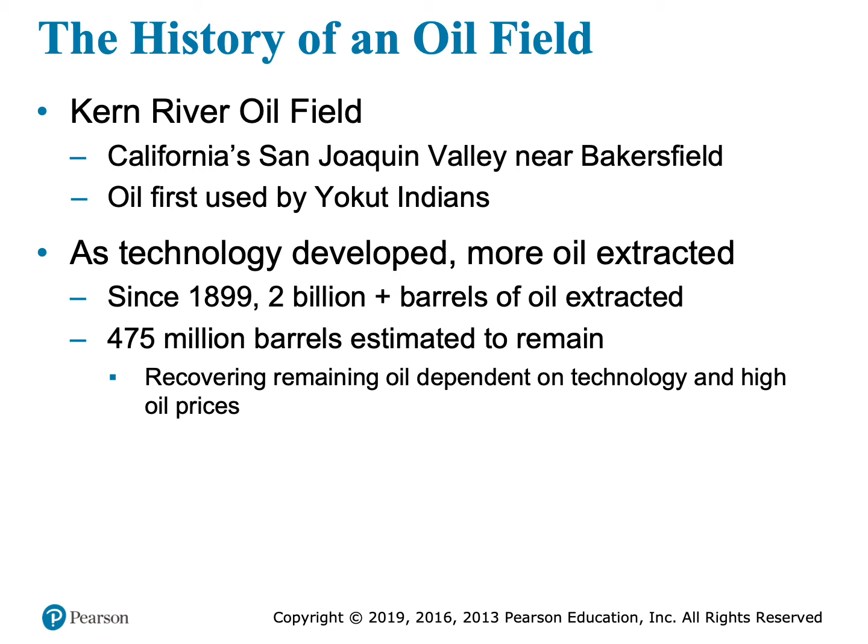There's the Kern River oil field in California's San Joaquin Valley near Bakersfield, where oil was first used by the Yokut Indians. As technology developed, more oil became extracted from this field. Since 1899, over 2 billion barrels of oil have been extracted from this field, with only about 475 million barrels remaining. Recovering the remaining oil depends on how good our technology is at getting it out, and how high oil prices are.

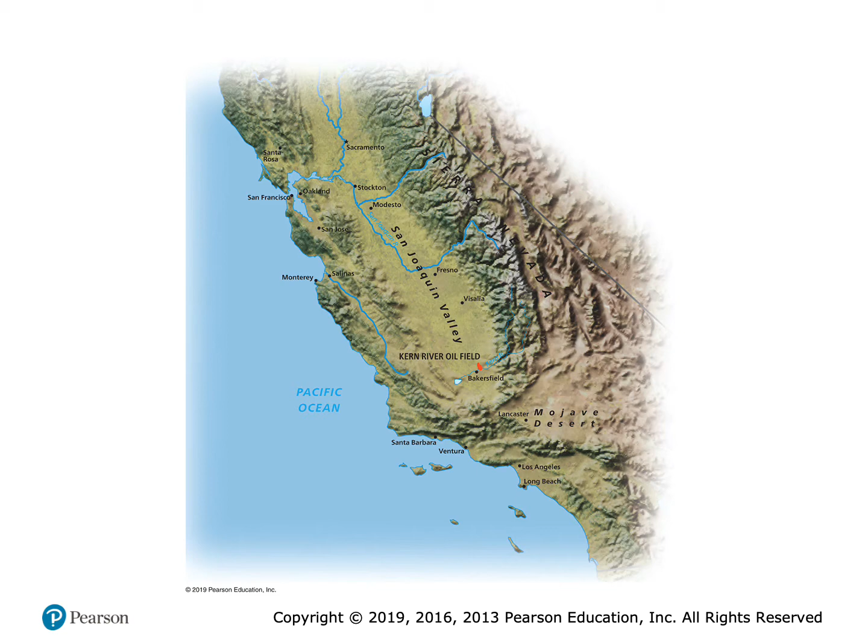Energy sources can be primary or secondary energy. Primary energy is energy contained in natural sources such as coal, oil, wind, and sunlight. It can be changed into other forms through a process called energy conversion. These other forms are classified as secondary energy, such as electricity or the kinetic energy of an automobile. So electricity is when primary energy is converted into another form.

Usually that's by using sunlight, wind, coal, or oil to move a turbine or a big blade, and moving that turbine generates electricity. End use refers to the final application of energy, such as running an appliance or driving a car. The energy conversion efficiency is the percentage of primary source energy that is captured in a secondary form of energy.

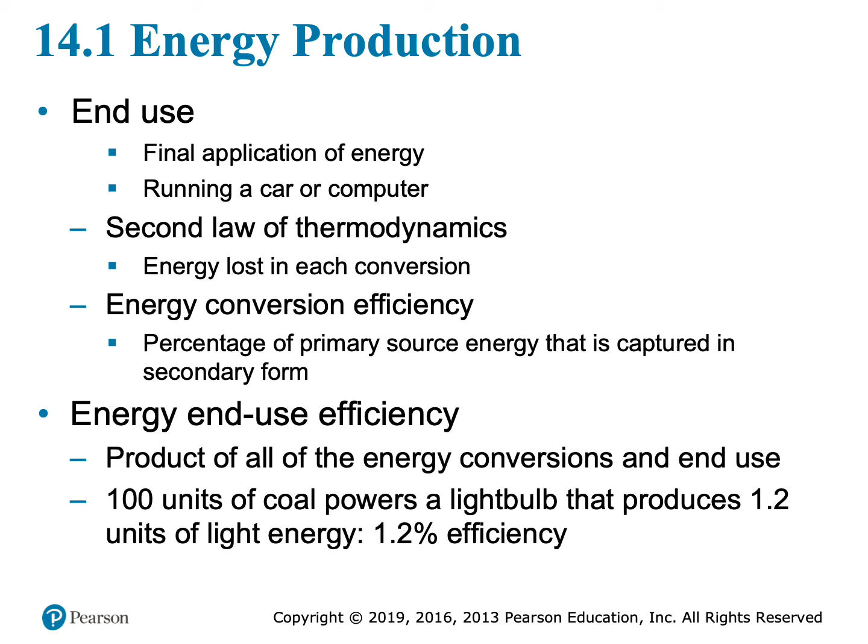The big forms of energy are either non-renewable or renewable. Non-renewable energy is derived from sources that exist in limited quantities - kind of like when you use them, you lose them, there aren't any extra left over. These include fossil fuels such as oil, coal, and natural gas, and nuclear, which relies on the element uranium.

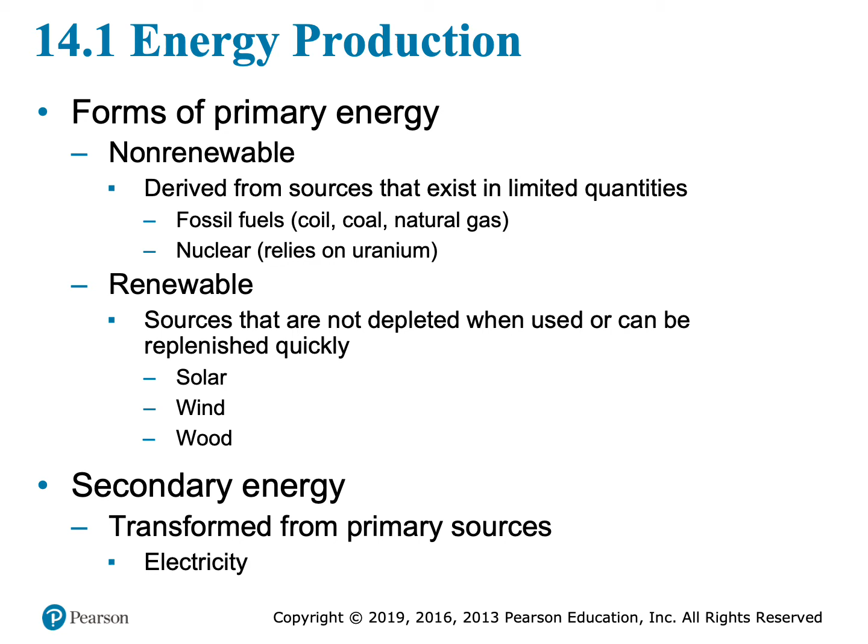Renewable sources are a little more popular nowadays. These are energy sources that are not depleted when used, or that can be replenished quickly. So solar is a renewable form of energy - we'll always have sunlight, we'll always have wind, and we'll always have wood from timber and trees. Then secondary energy refers to energy transformed from primary energy sources, such as electricity.

The end use efficiency - this shows the electricity to power a light bulb comes from the potential chemical energy of coal burned in a coal-fired power plant. In these energy transformations, 100 units of chemical energy is required to produce 1.2 units of visible light energy. Again, this is what we call end use efficiency for this process, and it's 1.2%.

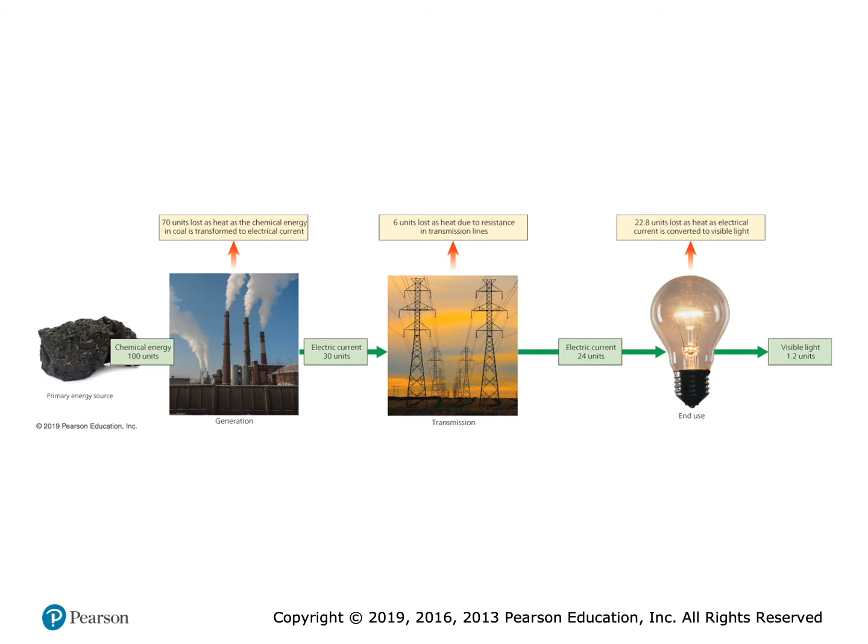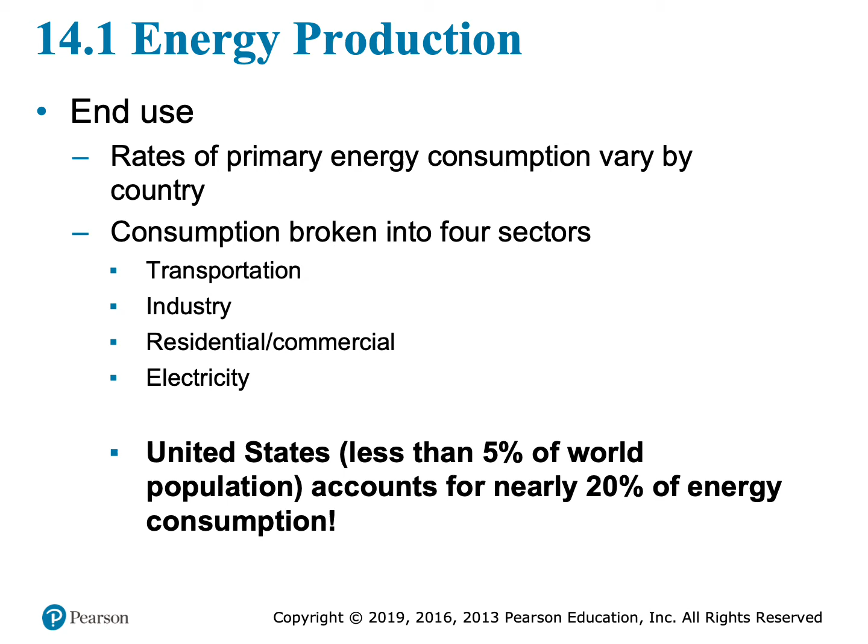For end use of an appliance or a car, the rates of primary energy consumption vary by country, and consumption of energy is usually broken into 4 sectors: transportation, industry, residential and commercial, and electricity. The United States, which is less than 5% of world population, accounts for nearly 20% of global energy consumption, which is kind of a crazy statistic.

Here's a look at the United States oil consumption gap. Oil consumption in the US has increased by over 3-fold since 1950 - again, think of powering your cars when thinking of oil production. US oil production peaked in 1970 and has started to decline, and it has increased since 2009 for reasons we'll discuss a little later.

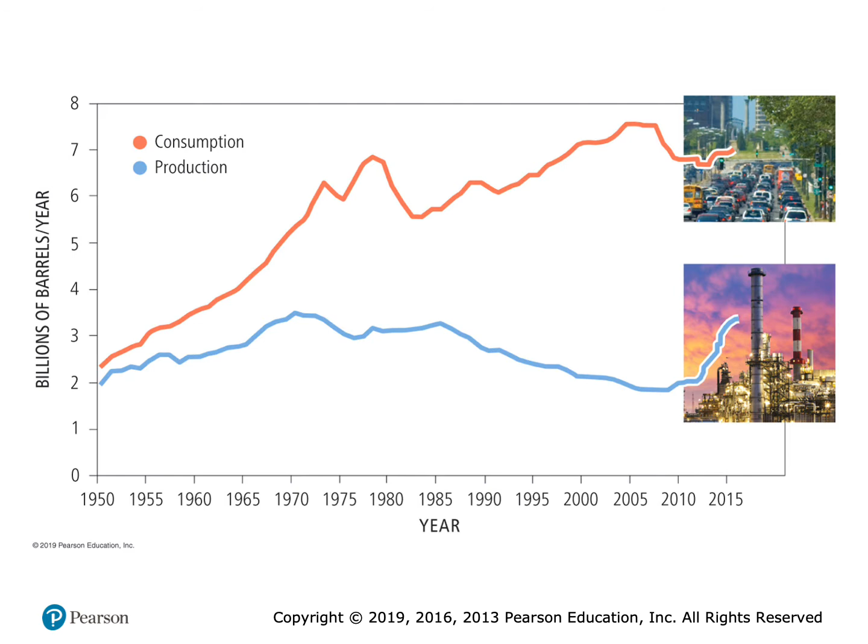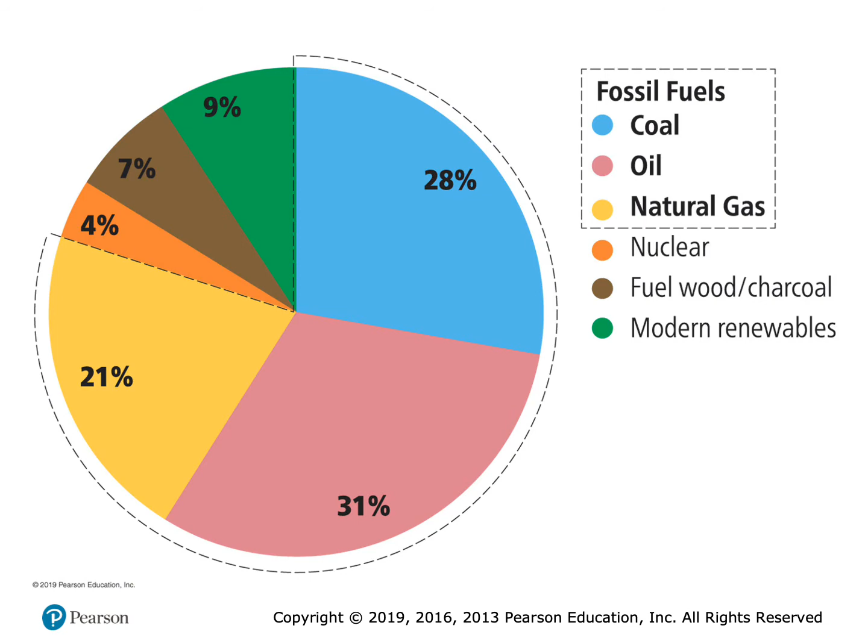Then we get to the economics of energy resources, and this brings us to the next part of our notes. The proved reserves of non-renewable energy sources are the quantities of an energy source that could be recovered from known deposits using current technology at current prices. And the reserves to production ratio, we put it as a fraction R over P, is the proved reserves figure for a given fuel divided by a particular year's level of production.

And we'll get to energy return on investment in the next slide. So this reserves to production ratio just estimates how long a fuel source will last at a current consumption rate. So again, a really popular ratio that many are wondering about with different energy sources right now.

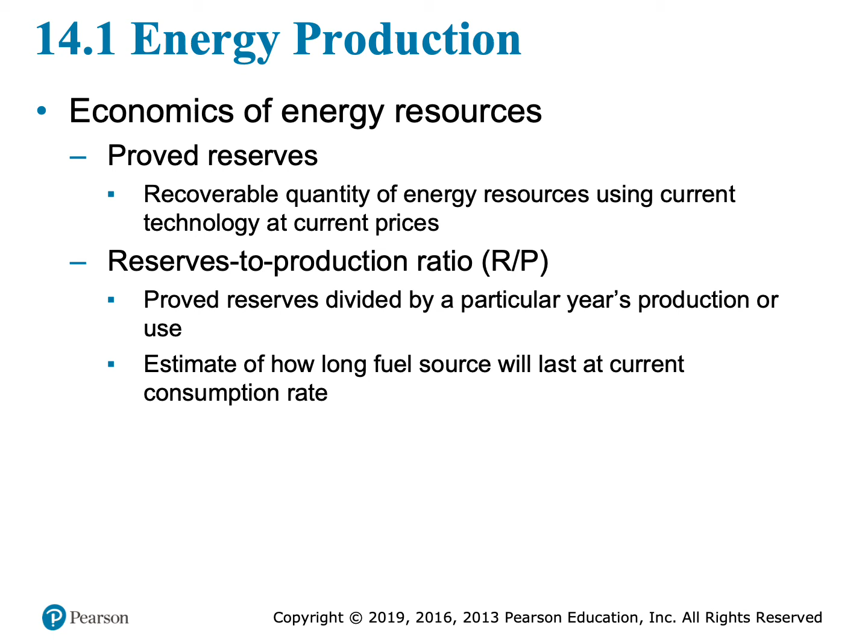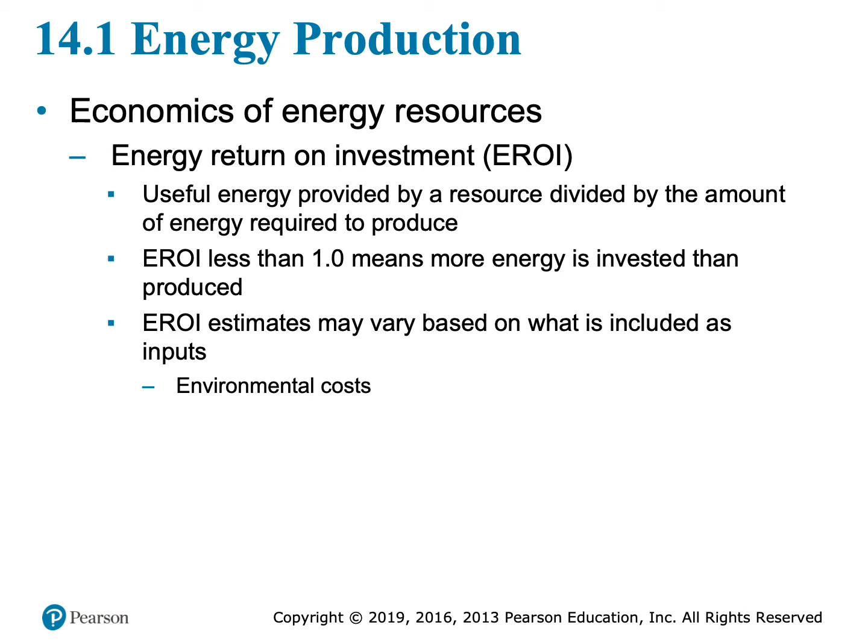The energy return on investment, abbreviated EROI, is useful energy provided from an energy resource divided by the amount of energy it took to produce it. If it's less than 1, it means more energy is invested than actually produced. And these estimates might vary based on what is included as inputs, such as environmental costs.

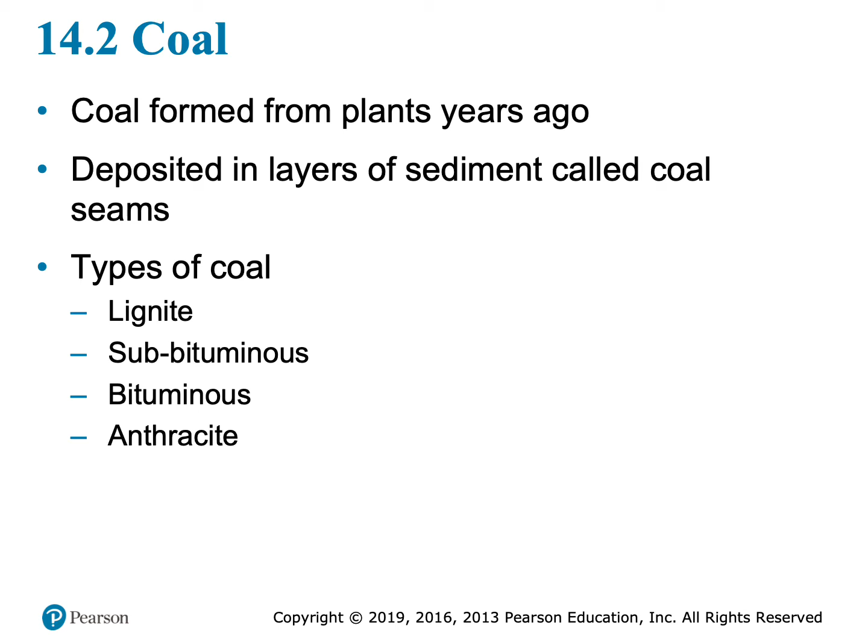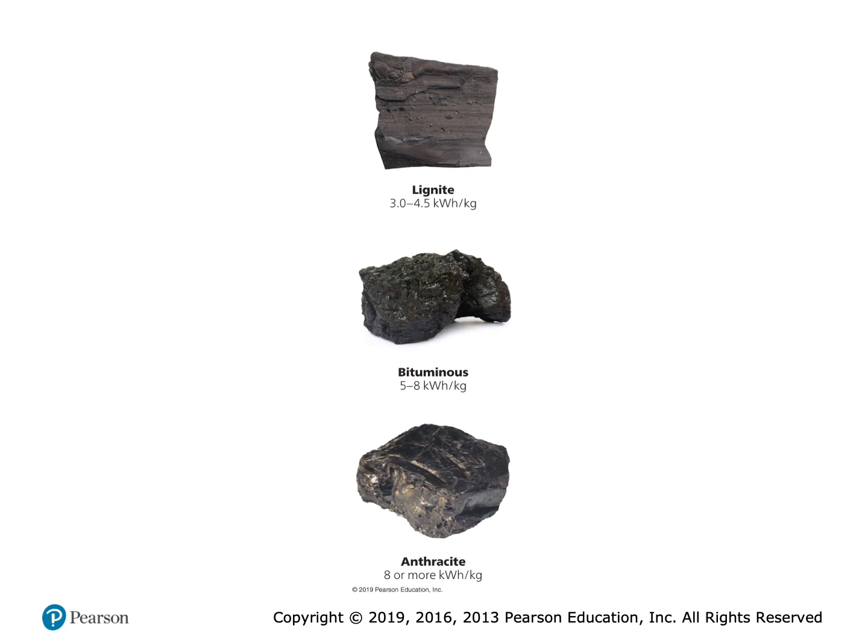So let's talk about coal and what it is. It was formed from plants many years ago. It's deposited in layers of sediment called coal seams, and there's different types of coal: lignite, bituminous, and anthracite. Here's a look at the different types of coal and the energy content per unit weight. It's highest in the coal type anthracite, which is the one at the bottom, and less in the ones at the top.

Extraction and processing of coal: it's removed from sediments by underground and surface mining, and then it's cleaned to remove dirt and other impurities. Globally, 67% is used for electricity generation, and 90% of that is in the United States. It's transformed into electricity at a coal-fired power plant.

So again, how does coal create electricity? We burn coal in a power plant, and that steam moves a steam turbine. So the steam from the burning of the coal will move this turbine, or a big kind of windmill-like structure, and that turbine then is hooked up to a generator, which creates electricity.

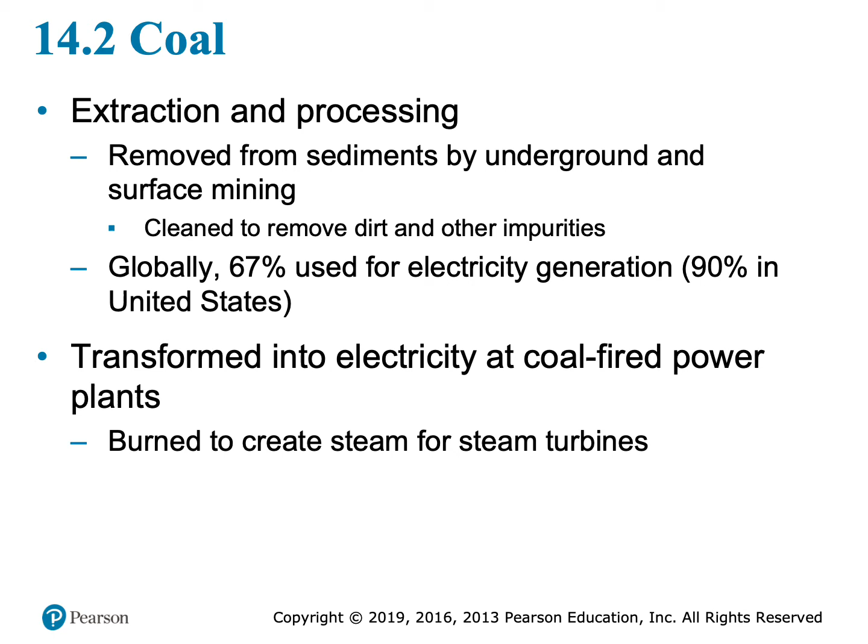World coal reserves are shown for selected regions and countries. Coal is very abundant in North America, Europe, and Asia. Among countries, the US ranks number 1 in coal reserves, as you can see from this picture.

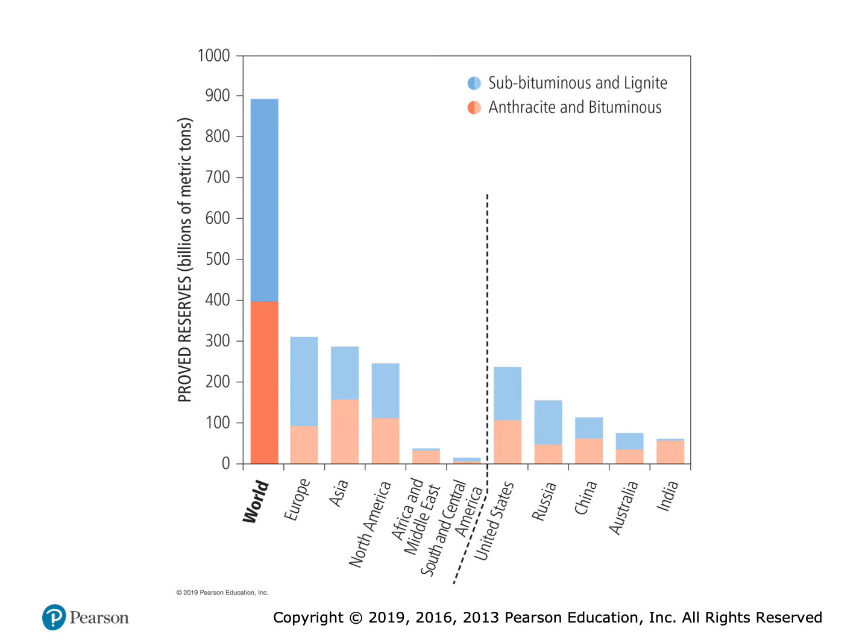Underground coal mines employ an array of shafts and tunnels. Some of these are used to transport miners and equipment into and out of the mine, and others are used to ventilate the mine and haul the coal out. And you might remember instances in history where people have been trapped in mines if a part of it falls down. So coal mining is very much active today still for electricity purposes.

In mountaintop removal coal mining, the upper portion of a mountain is actually removed to expose the coal seam, and the overburden is then deposited in surrounding stream valleys. And again, the coal seam is where the coal is deposited or found.

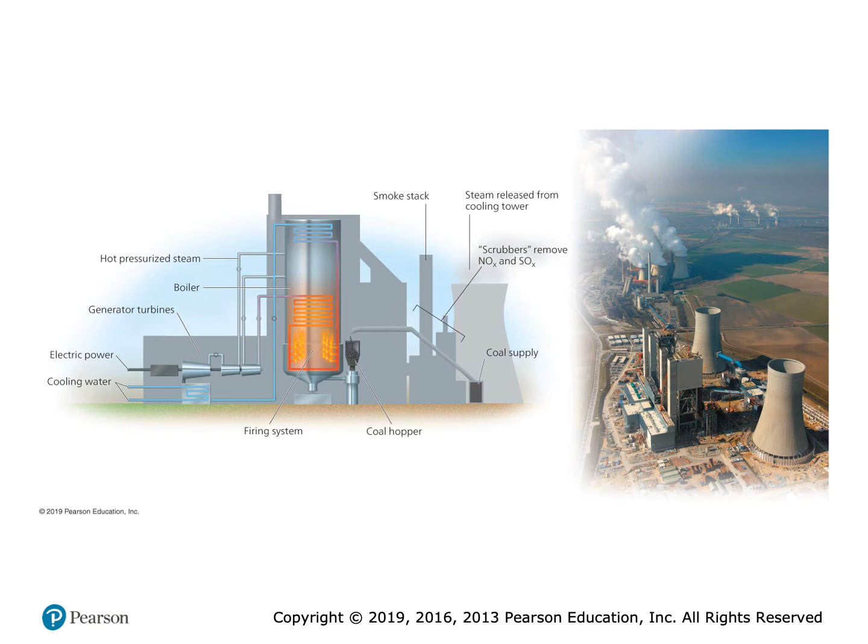A little more about coal, some of the environmental impacts of coal. Mining destroys habitats in mountaintop coal removal. Mine tailings, which are rock and debris from mining operations, can be acidic. There's usually a lot of exhaust from coal fires, which are releasing numerous toxins, mercury and carbon dioxide into the atmosphere. And fly ash is actually solid material waste that can be produced from these power plants as well.

So this is showing oil and gas reserves formed in porous rocks where there was enough organic matter to produce oil, and then an impermeable rock cap prevented its upward movement. So the natural gas, which is lighter than oil, gets trapped above the oil.

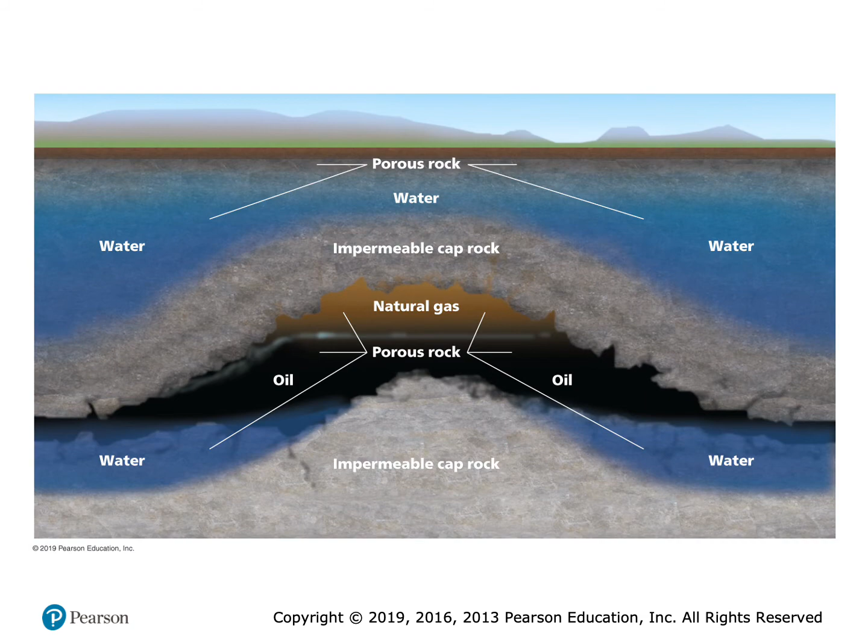These oil reserves can be conventional or unconventional. And if you're on the second page of your notes at the top, we'll answer your blank in number 3. Reservoirs composed of permeable rocks with numerous pores and fractures that hold small drops of oil are conventional. And crude oil and natural gas are found in other unconventional geological settings. Some other types of geological settings where we can find oil reserves are in shale and in tar sands.

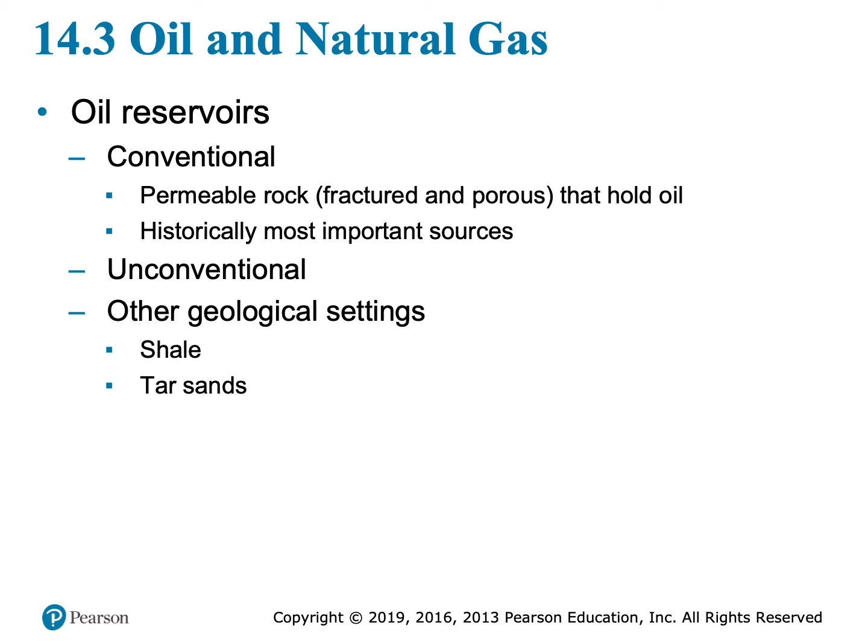Nearly half of the known oil reserves exist in the Middle East. About 18% is in Venezuela—that's how Venezuela got into a lot of their financial problems, because their government was actually borrowing money against oil that they were planning to export. 10% is found in Canadian tar sands, and only about 2% is found in the US.

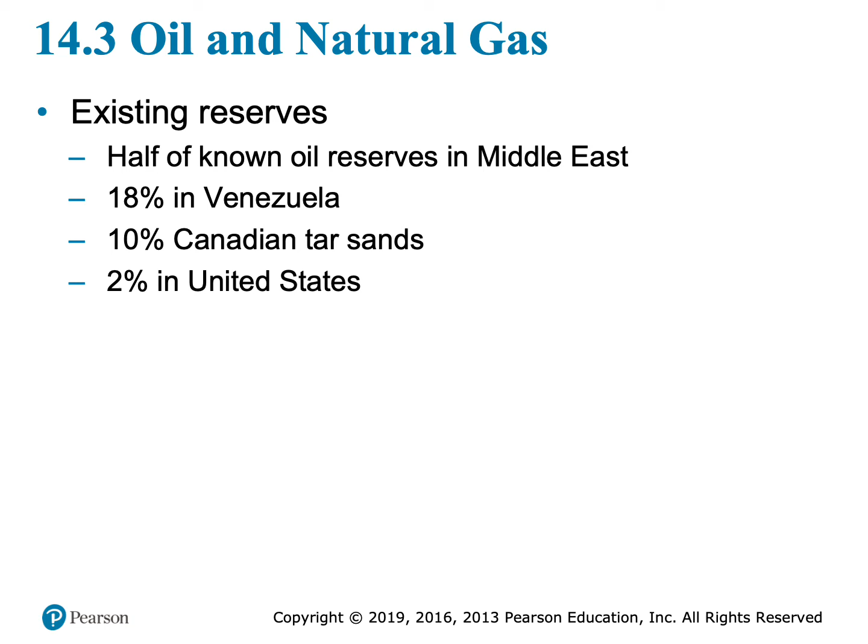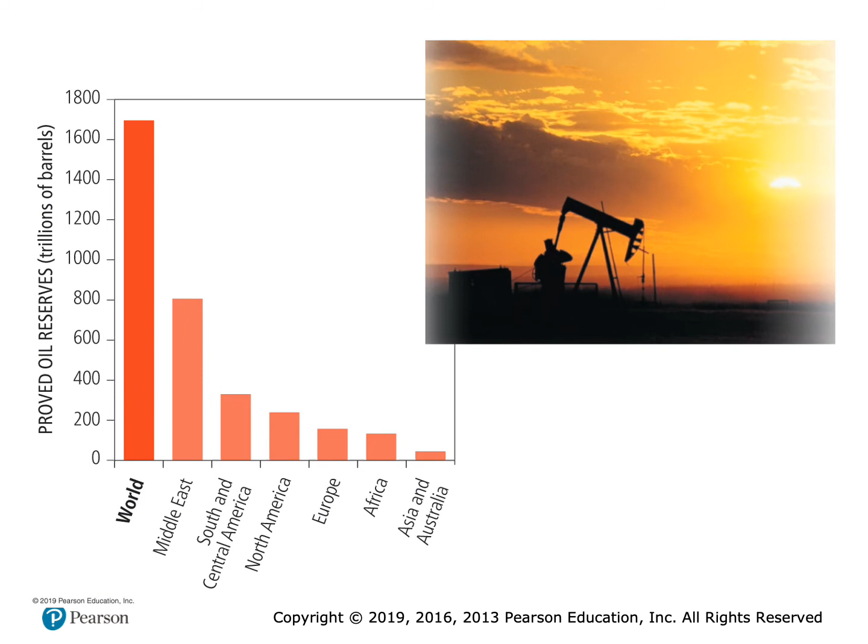Nearly half of global proved reserves of oil are found in the Middle East, as you see there, with many in South and Central America, and you can see where the other countries fall for proved oil reserves.

Oil extraction and processing. We're going to fill in some blanks here under oil production. Crude oil is pumped from reservoirs and sent to refineries. If there's enough built-up pressure to push crude oil to the surface, this is called primary oil recovery, and that usually extracts about 20% of the oil in the reserve.

After that, secondary oil recovery methods inject water into the reservoir to increase pressure and extract another 10 to 20%. Then oil companies use tertiary oil recovery methods that stimulate the flow of oil by injecting carbon dioxide, steam, or hot water into the reservoirs. Some of the rocks are not porous enough to allow sufficient flow.

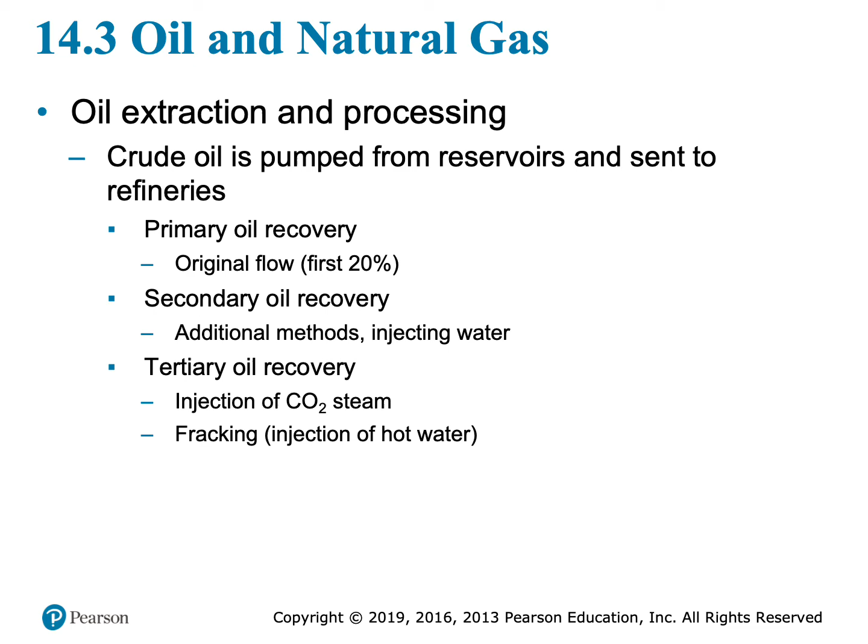Engineers have developed a technique called hydraulic fracturing, or fracking, that you'll hear a lot about. This involves injecting hot water to produce natural gas from deposits of shale, using high pressure liquid to actually fracture the rocks or break them apart. Sand mixed with these liquids then allows oil and gas to flow.

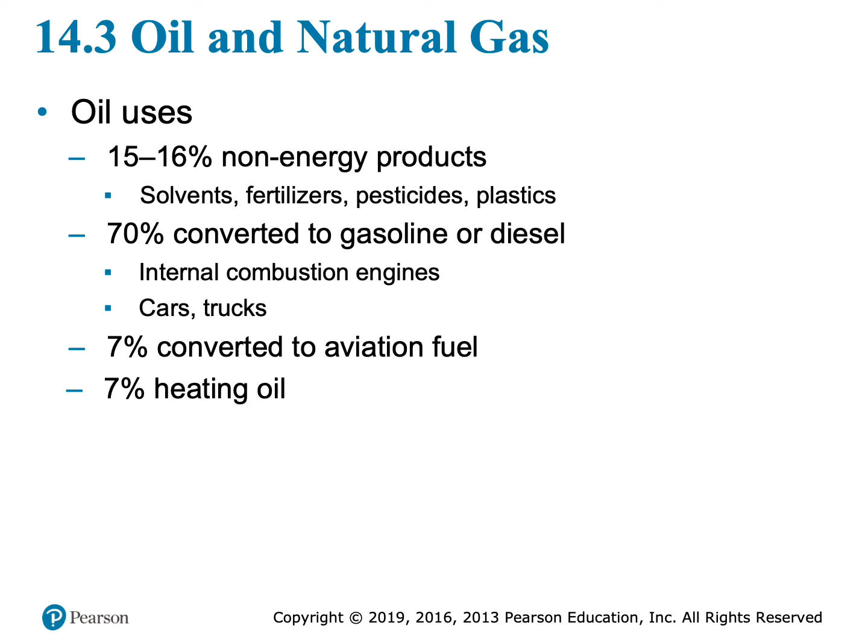Oil uses: 15 to 16% of oil is used for non-energy products like solvents, fertilizers, pesticides, and plastics. 70% of oil is converted to gasoline—I think we all know that, gasoline is the big sucker of oil. 7% is converted to aviation fuel, and about 7% is used for heating oil.

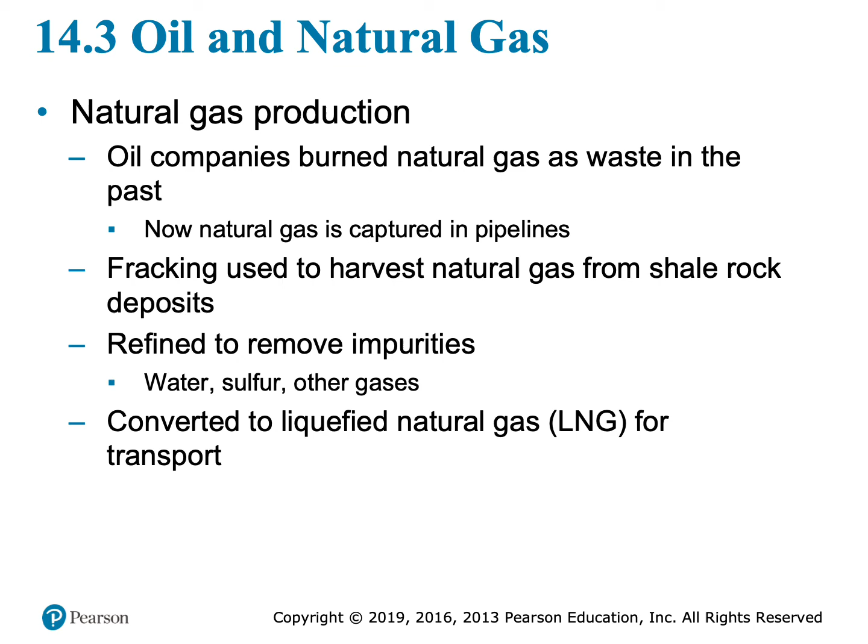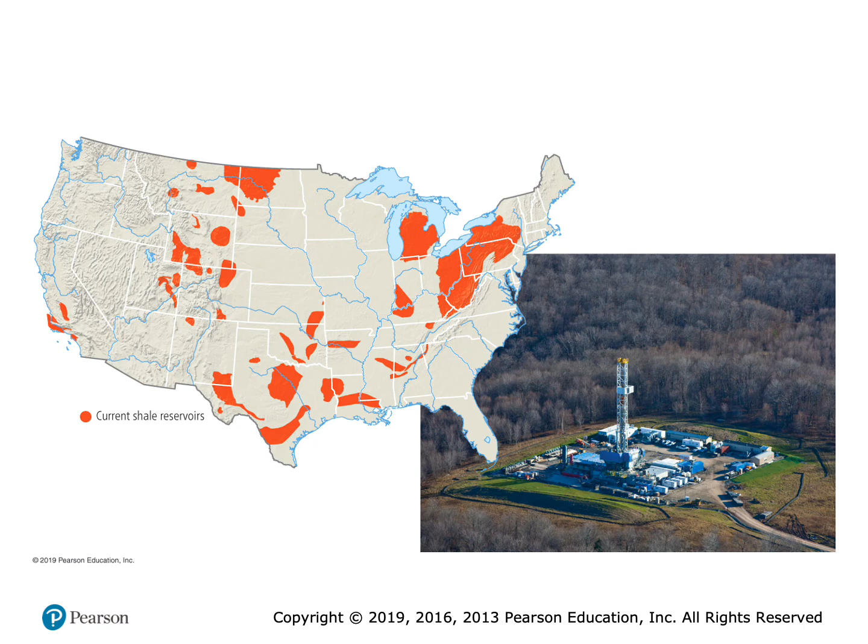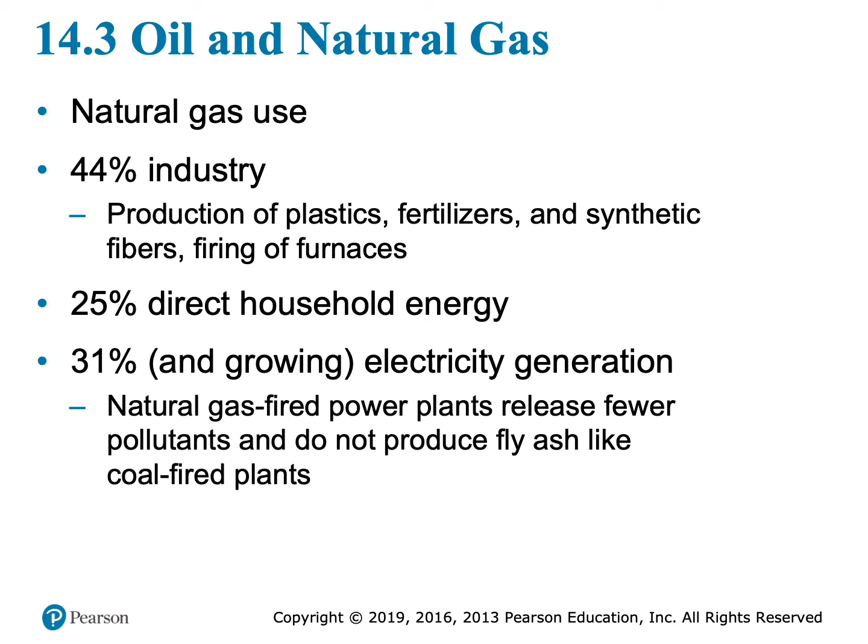Natural gas uses: 44% are used for industry, such as producing plastics, fertilizers, synthetic fibers, and firing of furnaces. 25% are direct household energy uses, and 31%, and growing, are for electricity generation. That's because these natural gas-fired power plants release fewer pollutants and do not produce fly ash like coal-fired plants.

Environmental impacts of natural gas—this is where we have some more blanks to fill out, about two-thirds of the way down on page 2 of your notes. Environmental degradation: locating and drilling for oil and natural gas presents risks to habitat and wildlife. Transport of oil and spills can cause major damage to wildlife. Emissions include carbon monoxide, carbon dioxide, hydrocarbons, and nitrogen oxides.

The combustion of oil-derived fuels accounts for 31% of all human-caused greenhouse gas emissions. Another impact, whether environmental or otherwise, is just the political turmoil—politicians argue either for or against certain aspects of these policies.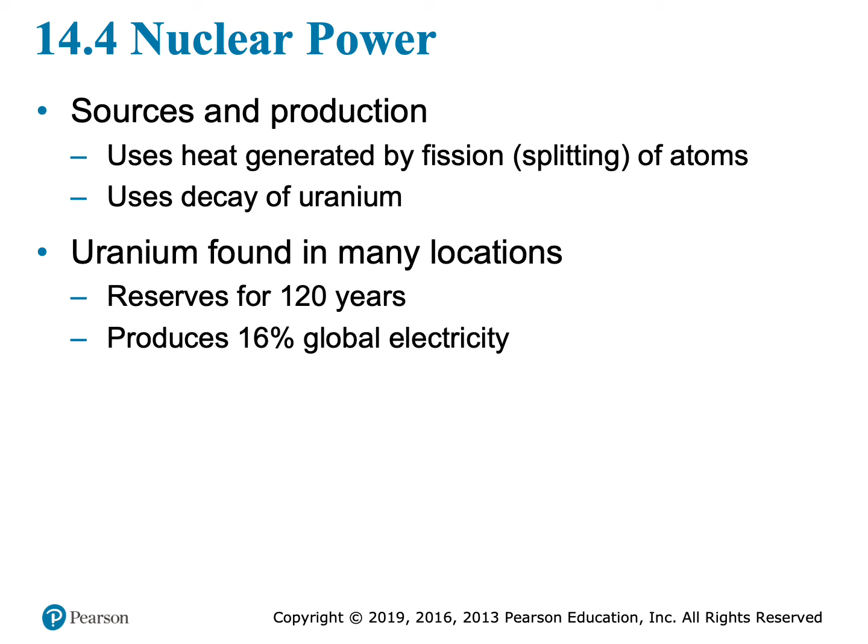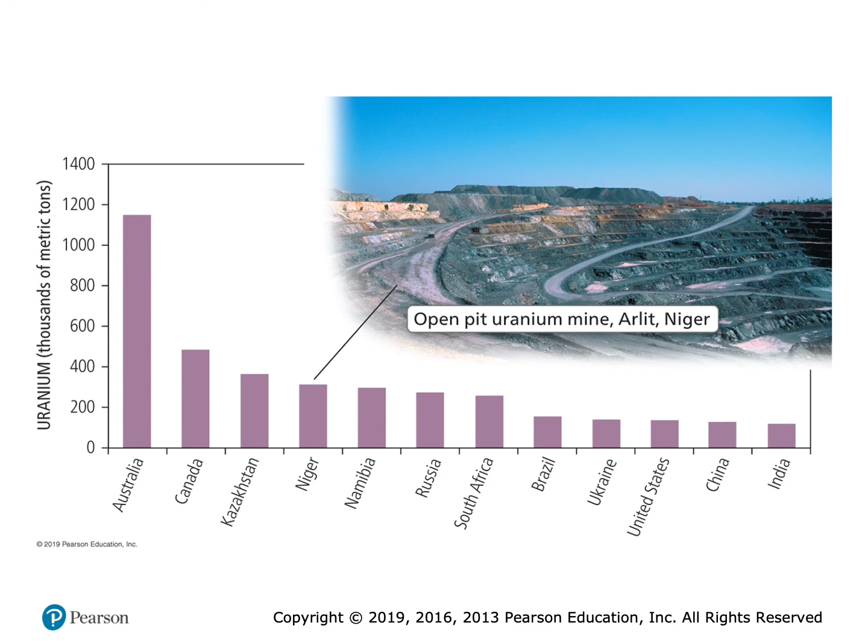But if it's controlled, there are reserves in many locations, and it can produce 16% of global electricity. Here is where the proved uranium reserves are located: Australia has a lot for some reason, Canada, Kazakhstan, Niger, Namibia, some Europe countries, some African countries, and South Africa and Brazil, some South America too.

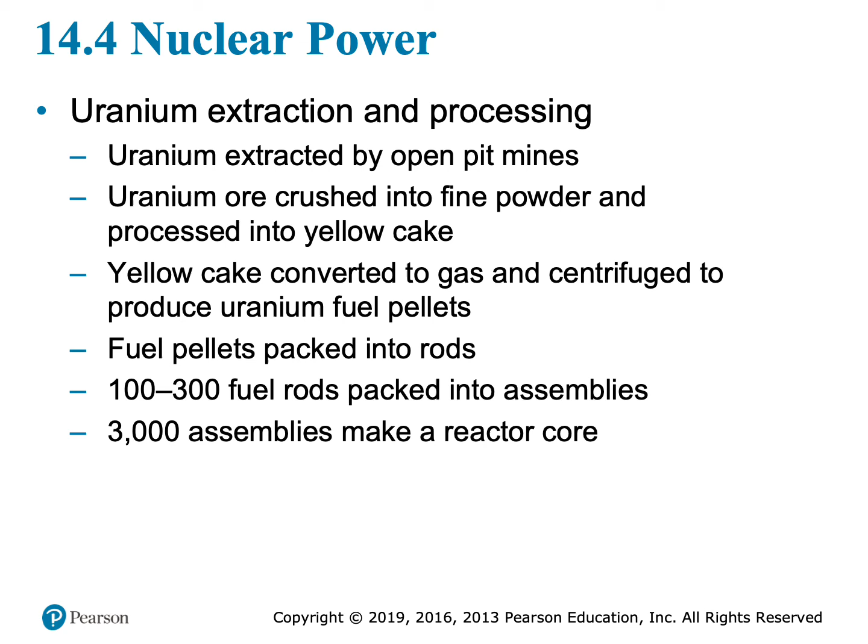Uranium extraction and processing: it's extracted by open pit mines. The ore that is extracted is crushed into a fine powder and processed into what they call yellow cake. The yellow cake is converted to gas and centrifuged, or spun down, to produce uranium fuel pellets, which are packed into rods. Then 100 to 300 fuel rods are packed into assemblies, and 3,000 assemblies make up a reactor core. So this is a look at how they get the yellow cake, put it into fuel pellets, into a fuel rod, and then take 100 to 300 to create a fuel assembly.

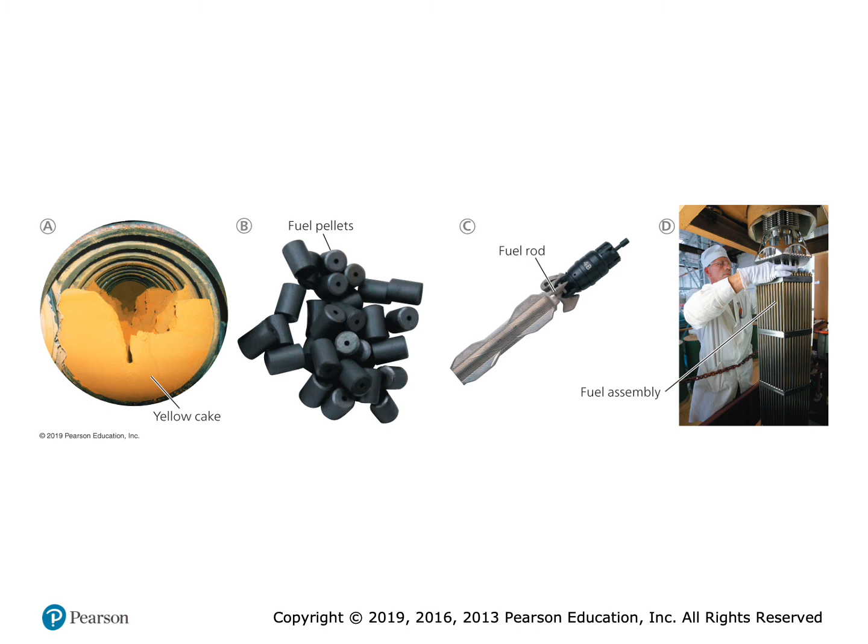The heat generated from the controlled fission of uranium is used to heat either water or sodium to extremely high temperatures and pressure. This superheated liquid is then used to generate steam. Again, the end goal is to produce steam that will power or turn turbines, which in turn drive electric generators and create electricity.

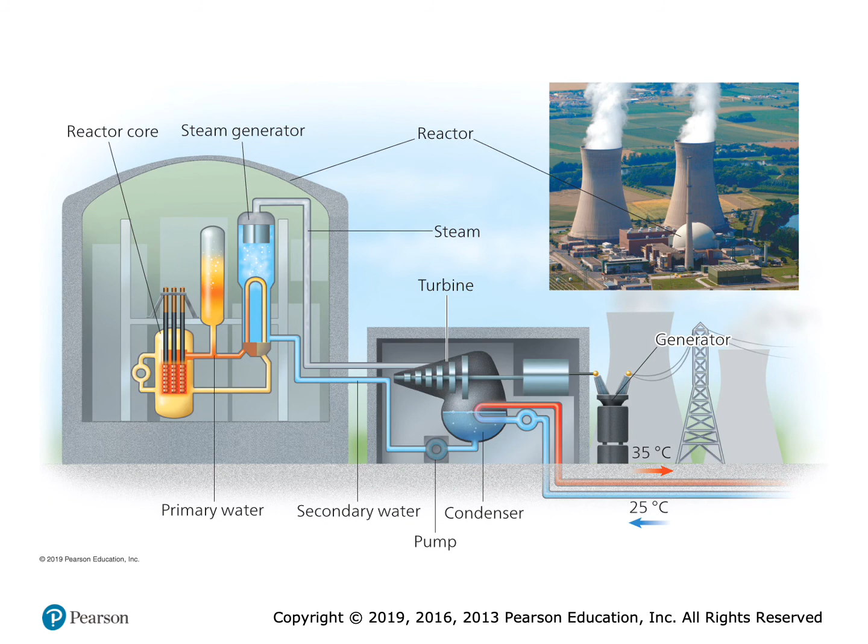Environmental impacts: there are benefits and costs that are very disputed. There are large open pit mines, thermal discharge, and meltdowns, which is when a nuclear plant explodes and releases some of that discharge into the environment, such as the 3 Mile Island nuclear power plant in Pennsylvania, or the Chernobyl nuclear plant that had a meltdown in Ukraine. Radiation can leak. Spent nuclear fuel refers to fuel that no longer can be used in reactors, and it must be carefully stored and monitored.

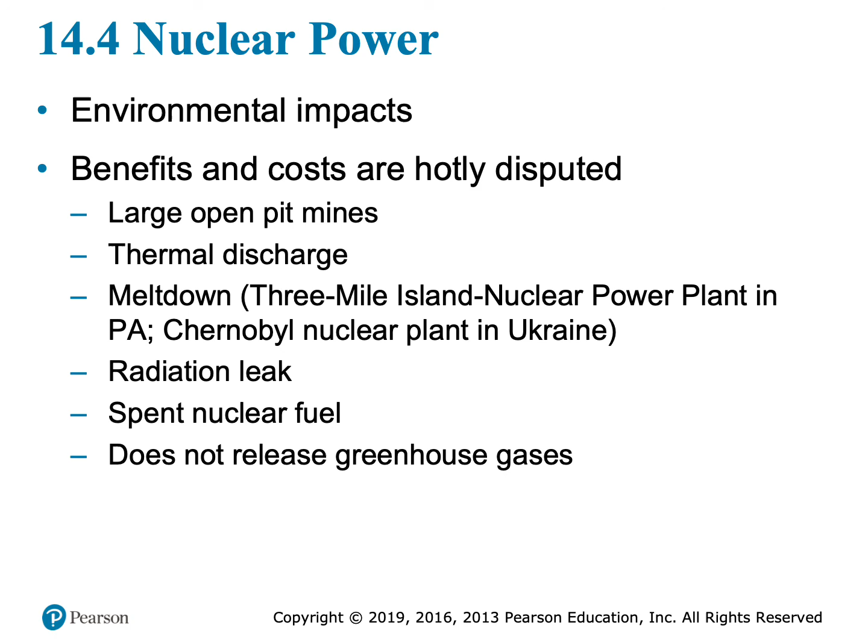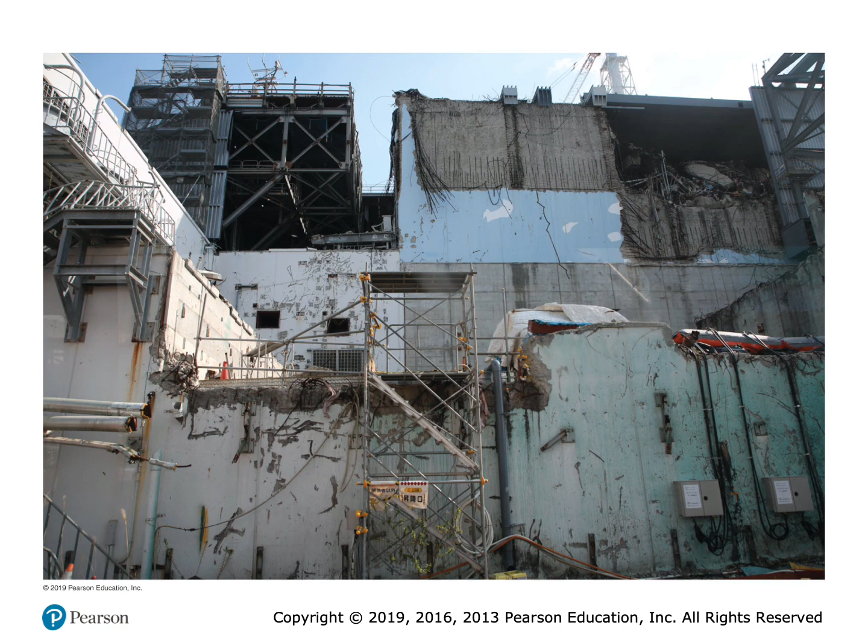This is what remains of Reactor 3 at a nuclear power plant in Japan. Six years after an earthquake and a tsunami, millions of gallons of radioactive water continue to pour into the ocean, and high amounts of radioactive cesium have been detected in fish caught within 100 kilometers of this facility.

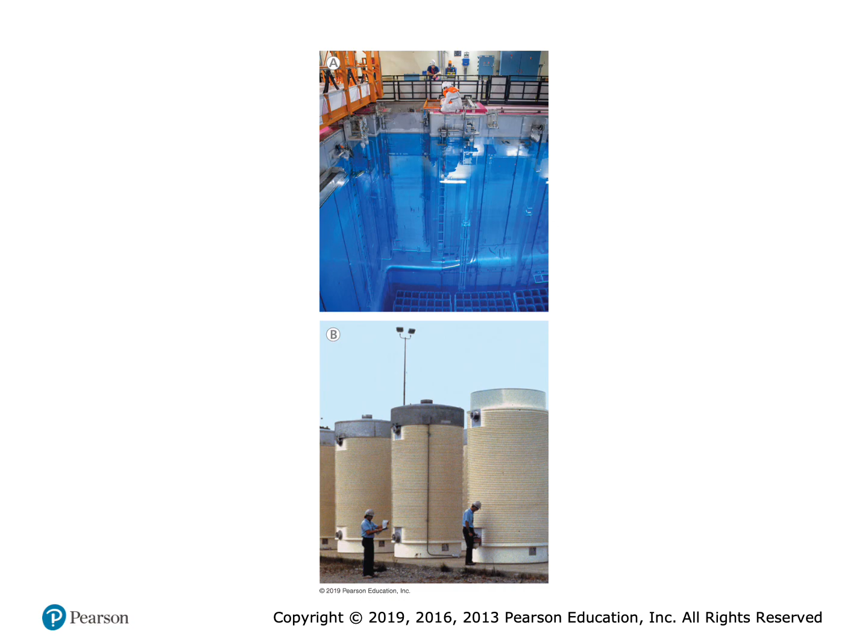Generating electricity with electric power: the generation, distribution, and use. This is a look at electric power, where electric current is a flow of electrons through a wire. We measure this current in amperes or amps. That's another blank for you there.

Electric power is measured in kilowatt hours, and the electricity generated in power plants uses turbines to drive electric generators. The charged particles in electric current flow between terminals that differ in electrical potential and are measured in volts. So if you're filling out your notes, number 1 is amperes and number 2 is volts.

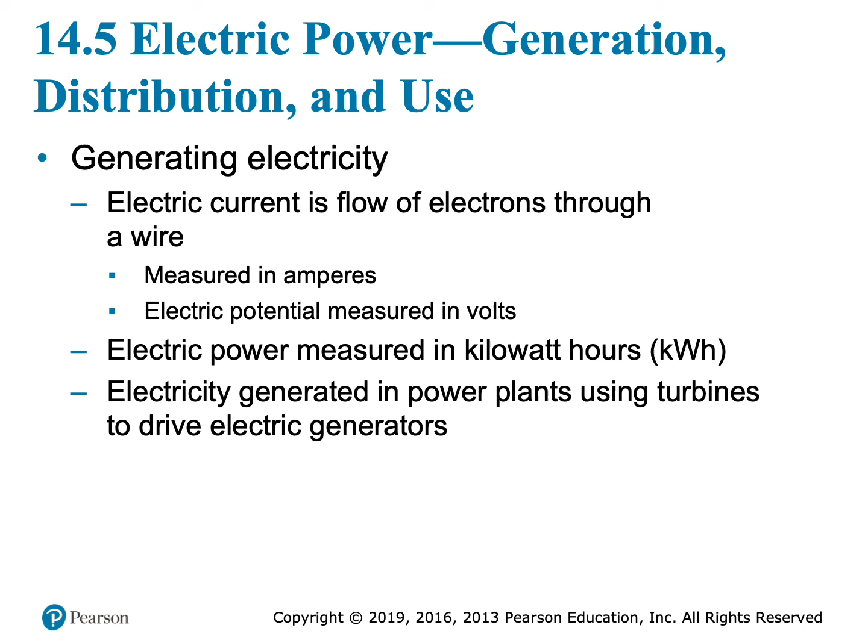This is an electric generator. A variety of power sources can be used to spin the central rotor of a dynamo and generate an electrical field, and this one is designed to use steam generated from burning natural gas.

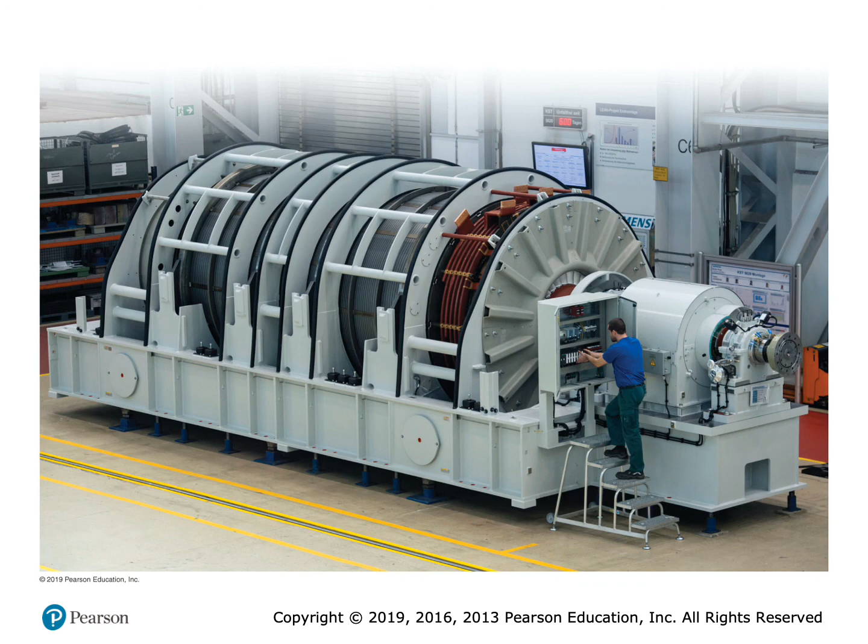Here are alkaline batteries, which use zinc powder and manganese dioxide to generate electrical potential. And batteries' strength of electrical potential diminishes, however.

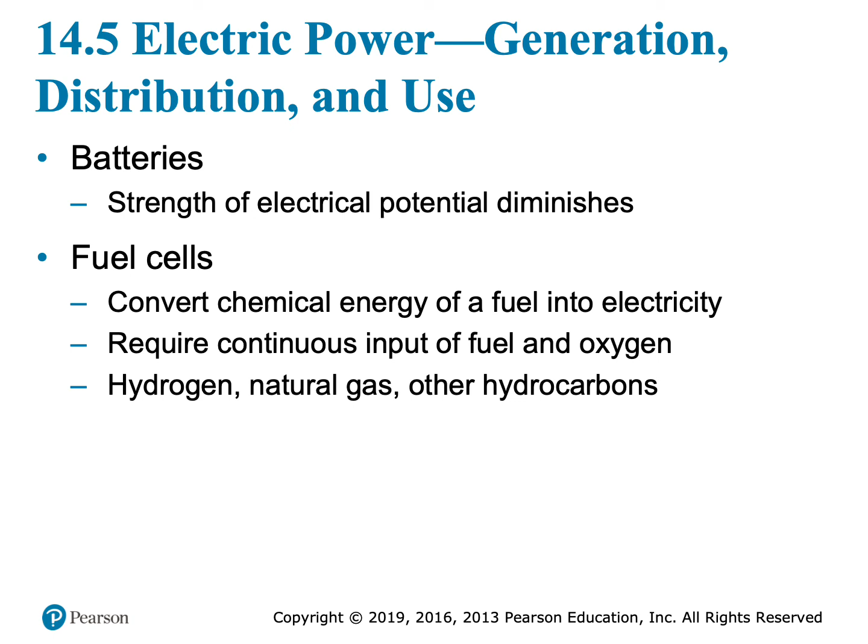Fuel cells, which is your last blank in your notes, convert chemical energy of a fuel into electricity through a reaction with oxygen. Unlike batteries, fuel cells require continuous input of fuel and oxygen to sustain the chemical reaction that generates electricity, and hydrogen is the most common type of fuel cell.

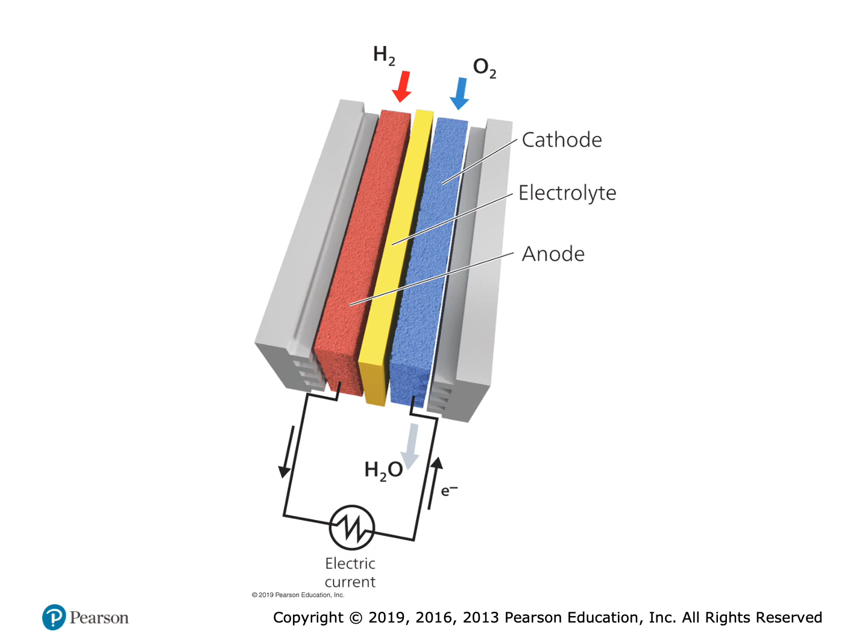Here's a look at a hydrogen fuel cell. The dissociation of H2 into protons and electrons is used to establish an electrical current that provides power to do work. Some environmental impacts of fuel cells.

There's an electromagnetic field that's produced by these transmission lines. PCBs can be in the transformers and thus eventually get into the atmosphere when we need to throw these things away. Chemicals from batteries can exist, like lead and heavy metals, so you should always recycle your batteries and never throw them away.

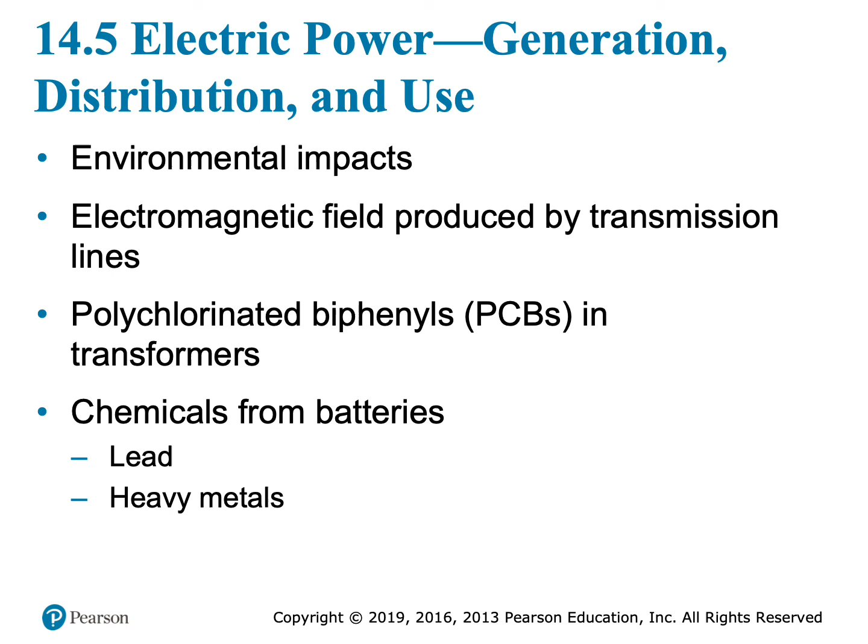This is PCB contamination wastewater from a General Electric Corporation facility that manufactures electrical transformers, which actually contaminated the sediments over large stretches of the Hudson River with PCBs. The company spent about $1.6 billion dredging river sediments. The United States in 2016 declared the cleanup complete, however.